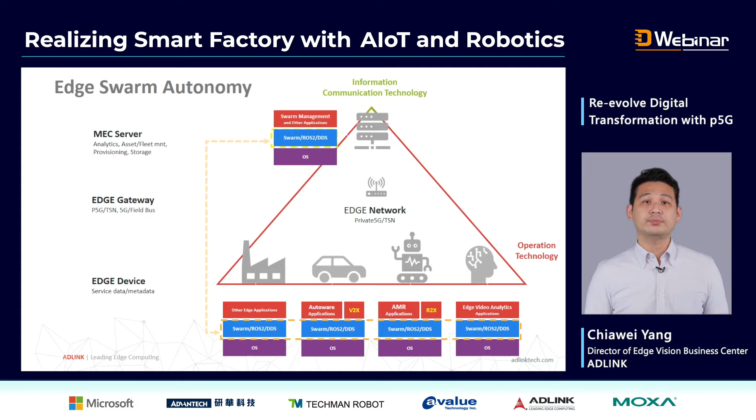Let's take a look at smart manufacturing specifically. I'd like to share the 3 key success factors. The first one is the field. The field can bring more experience, not only to enhance the production process, but also to identify or define the right edge devices for a better world. So for us, field, domain know-how, as well as metadata, will be the 3 key success factors impacting the success of smart manufacturing.

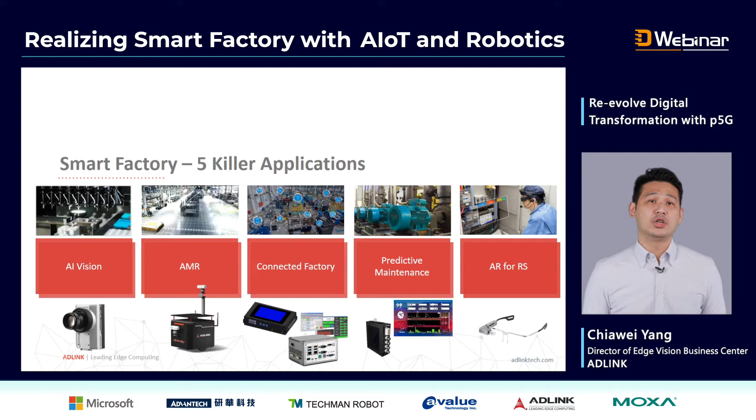With more than 3 years of experience, I'm glad to share that most factory owners right now are considering what could be the right topic, the right technology to bring in to enhance operation efficiency, lower the defect rate, and increase productivity. So the 5 topics include AI vision, AMR, as well as the 2 classic IoT applications, and last but not least, how to leverage an AR camera to do training or repair missions.

Having said that, you may understand factories are used to utilizing AOI equipment to ensure production quality on different objects, whether it's mobile phones, laptops, or even food and beverage.

But in the past 3 years, factory owners have realized there are already 100 or 1,000 cameras deployed in the factory. So we can leverage the existing camera system or NVR system, just empowering it with some AI capability to convert image or video into digits—from analog signal, the image, into useful data. Then you can do more analytics and calculate operation time, cycle time, or whether someone has stepped into a hazard zone, ensuring more safety for both human beings and the entire process.

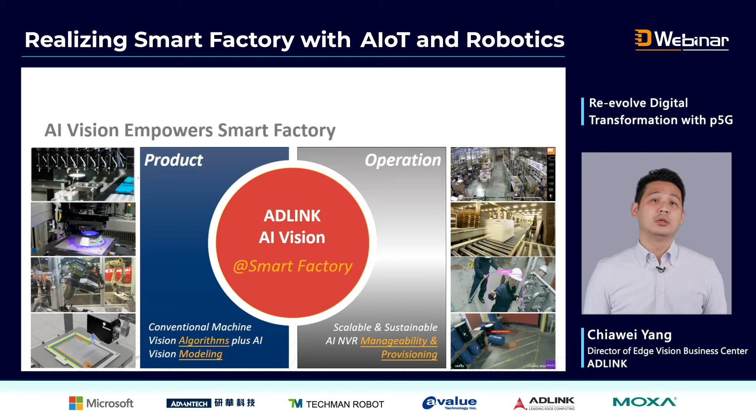With a bunch of cases, we've engaged with customers and system integrator partners, so I'd like to share some interesting examples. On your left-hand side, you can see people utilizing an AI camera to ensure safety in a construction area, and also leveraging the AI camera to count people and identify gender, because they can calculate which model or goods will earn more money.

Also on your left-hand side, with more and more autonomous vehicles deployed into the factory, you may need an automated alert system to avoid any collision with a human being. On your right-hand side, you can see examples like food and beverage, chicken wings, tires, and agriculture, leveraging AI vision to detect defects, which was quite difficult to do in the past.

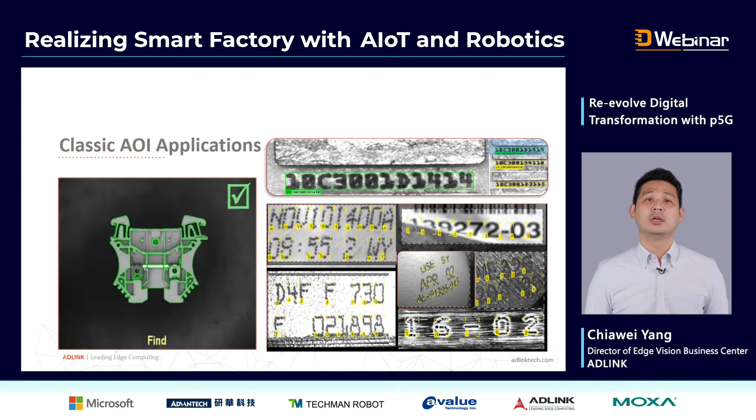Let's look at two classic applications for traditional AOI, like measurement or identification by scanning a code. But it's not good enough, because considering a character or a number on your t-shirt, it's quite difficult to identify or convert into digits.

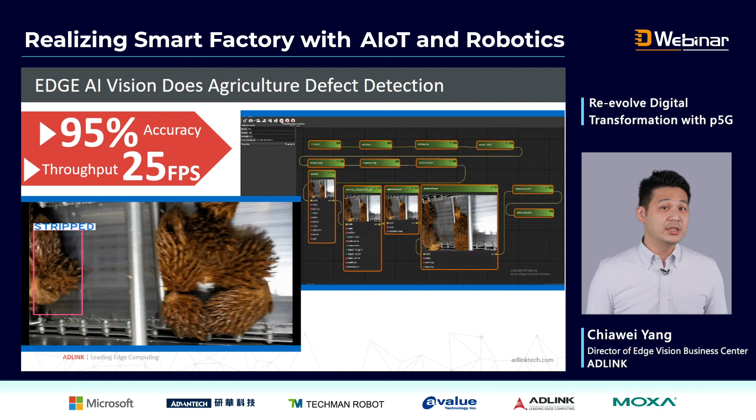So you may need not only traditional machine vision software, but also more specific AI models. I'll share an interesting case: people utilizing an AI camera with a specific AI model to detect whether fruit, like oil fruit, is stripped or not. With a no-code low-code environment, you don't even need to think about hiring a data scientist or software engineer. You just need to leverage your in-house system integrator engineering team with this no-code low-code environment to design the entire AI vision application.

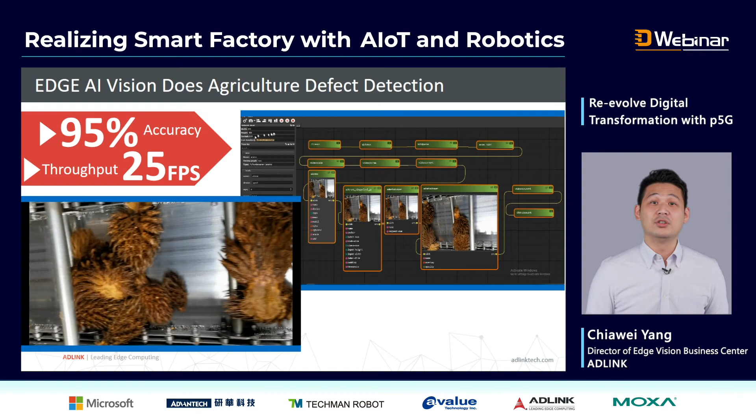There's a second case, as I mentioned earlier. It's not only about ensuring operation efficiency, but also ensuring safety for not only your employees but also contractors. A typical case is a semiconductor foundry hiring a contractor to refine chemical ingredients. So how do you ensure the operator or contractor wears the suitable safety suit, and the truck parks in the right place? By leveraging the AI model and AI camera, our customer accomplished this mission easily.

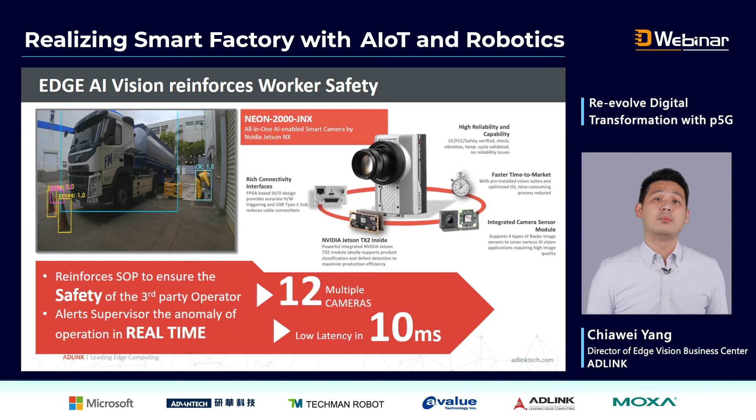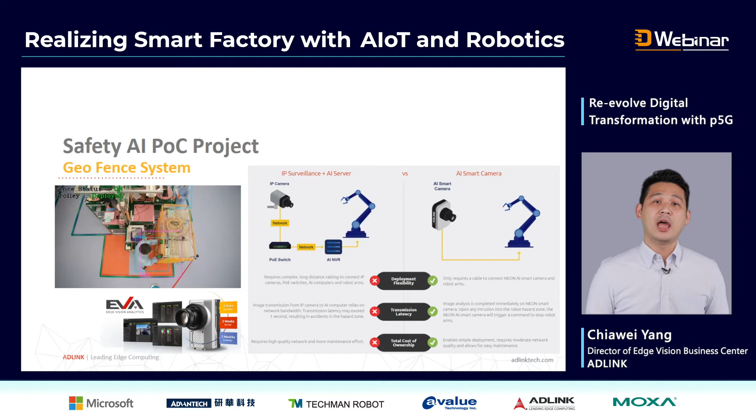For instance, we established a geofencing system in our own factory. You may be able to see the video on screen. With geofencing technology, we can identify whether the operator wears the suitable gear, and prevent any high power damage to the human body.

As I mentioned earlier, no-code low-code environment is now a famous tool chain for AI applications. It's not only beyond Python script - of course we can integrate with Python script, don't get me wrong - but we can utilize this no-code low-code IDE environment to accomplish the entire AI application in four steps.

The first step is to capture the image, with a bunch of cameras which includes IP cam, industrial camera, RTSP, or even streaming from another server. The second thing is how to do image preprocessing, because your edge devices may have limited computing power to do the analytic things. So it will be very powerful to help you save money and computing power in the third step.

The third and most important step is doing the inference. We host two major inference engines: OpenVINO powered by Intel, and TensorRT powered by NVIDIA. We also host ONNX runtime and model powered by Microsoft. So there are three major AI inference engines you can manipulate with your specific AI model. Last but not least, you have to stream out your result with the right analytic inference engine.

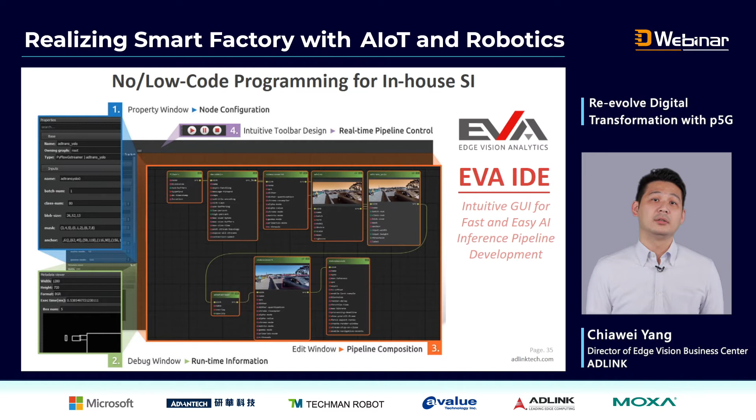But beyond just a tool chain, with 18 months of experience working with our system integrator partners as well as end users, we understand and identify 80% of the common interests from the factory. For example, geofencing to ensure safety around the factory - it can be designed to ensure safety around the robot arm, and to avoid any indeterministic object entering the hazard zone.

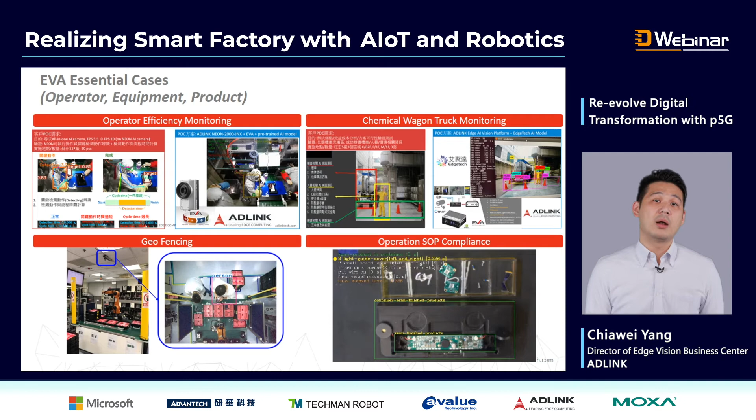But there's still a challenge for AI vision, because you can find a bunch of AI models created by freelancers on open source, and you may understand it may not all be workable with our offering. The good thing is we identify more than 20 applicable AI models here, and by leveraging NVIDIA, AWS, or Microsoft Azure service, you can do the labeling, then generate the suitable AI model, then deploy it onto our EVA devices.

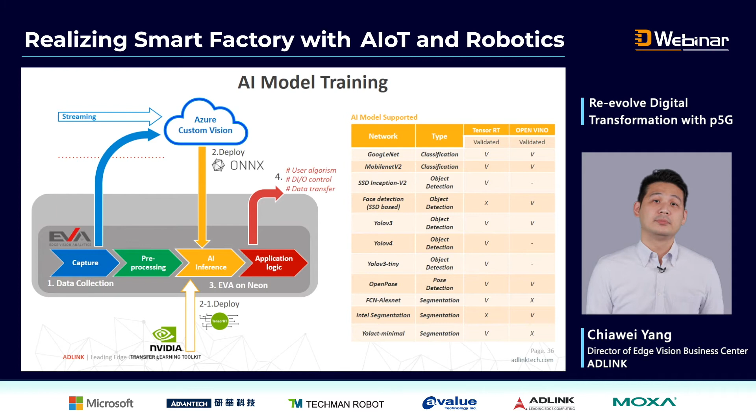But beyond that, it's not good enough to help you kick off your POC project. Before you identify the return on investment, we understand you need certain evidence from the AI POC project. So how to shorten the period to deal with the POC project? That's our offering: a fast AI Vision POC kit, which includes not only the local environment software environment, but also an AI smart camera already integrated with the right sensor, the right computing power, the right I/O, as well as connectivity. Not even mentioning, we also have a bunch of sample code or templates, so you can just change the input source or even change the inference engine.

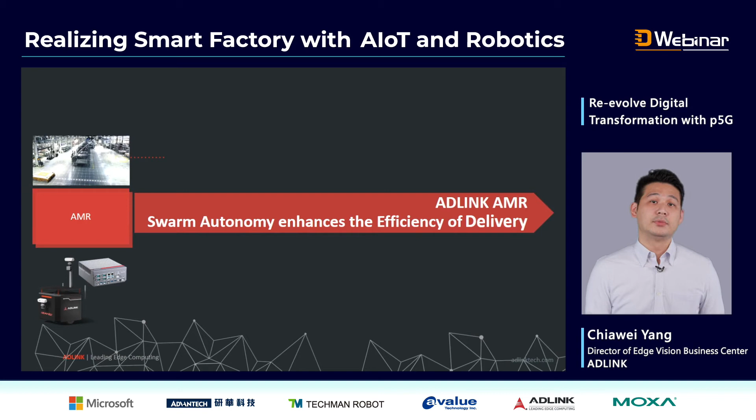The second thing is AMR. So considering if you need your devices with more mobility and can shift the goods from A to B dynamically as well as automatically, beyond the traditional AGV system, the AMR system can help you avoid any collision with different obstacles. They can also work together by controlling with the fleet management system, and they can share messages, results, or even data with their neighborhood. That's a fantastic system.

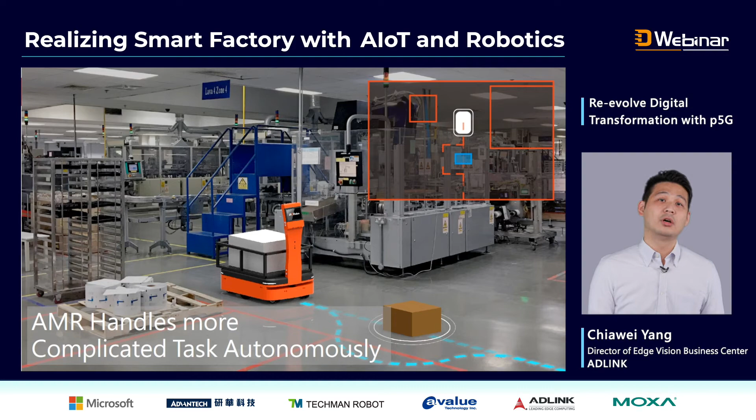Considering outside of a factory, people talk about the autonomous vehicle; indoor, we call it AMR. That's a very typical case that we already found and deployed in the AUO factory. It's not only about cooperating with each other with different AMR systems, but also cooperating with traditional AGV systems, and streaming data and results to the fleet management system as well as the MES system.

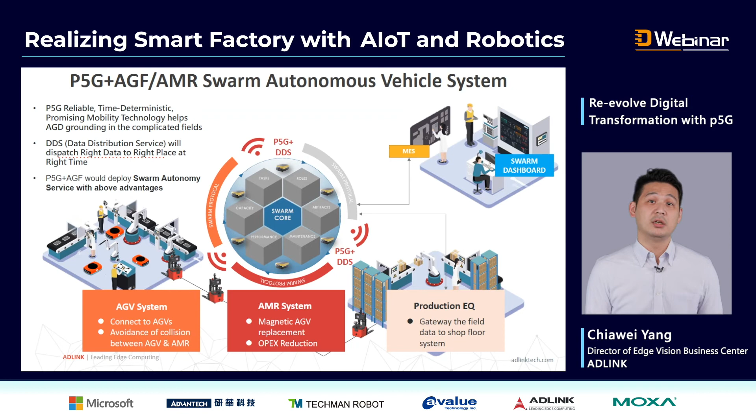Last but not least is still regarding IoT. With a bunch of sensing systems as well as gateway systems, right now the factory can say they may have some digital twin for their factory.

But considering the penetration rate is still low, the share is still low, that's why factory owners are still chasing more and more powerful IoT devices to extract data from legacy machines or from machines without a controller.

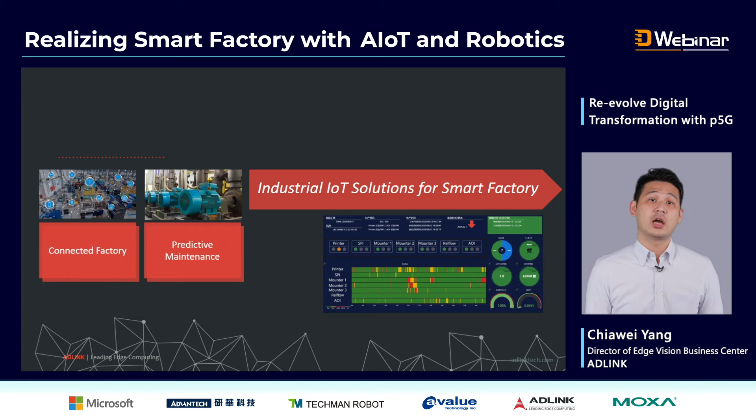Having said that, you may be able to identify pumps, different kinds of pumps operating in your factory, like the air compressor, dry pump, for semiconductor use. It's quite difficult to get the healthy or operation status from old equipment without a controller.

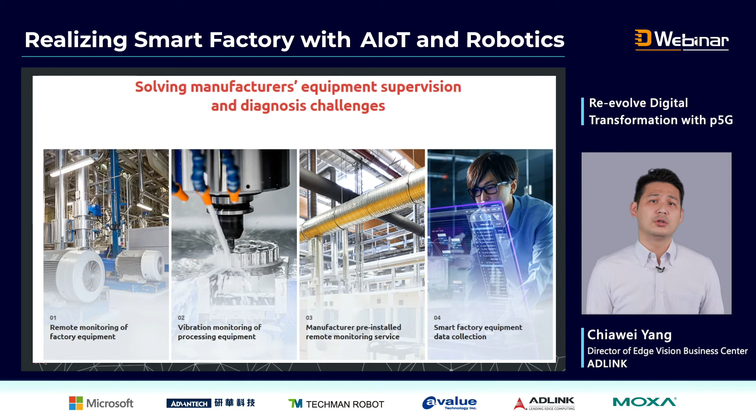That's why Adlink provides very unique devices which are able to extract data from both PC-based equipment as well as PLC-based equipment. Thanks to AUO Digitech, we have a very tight synergy to develop this data acquisition system, which is a PLC gateway without any coding.

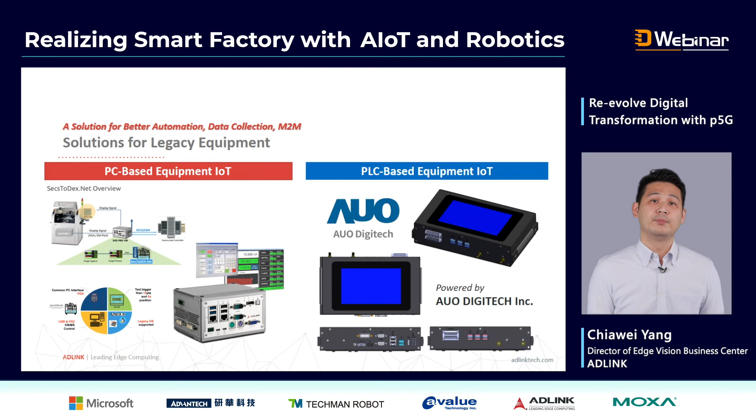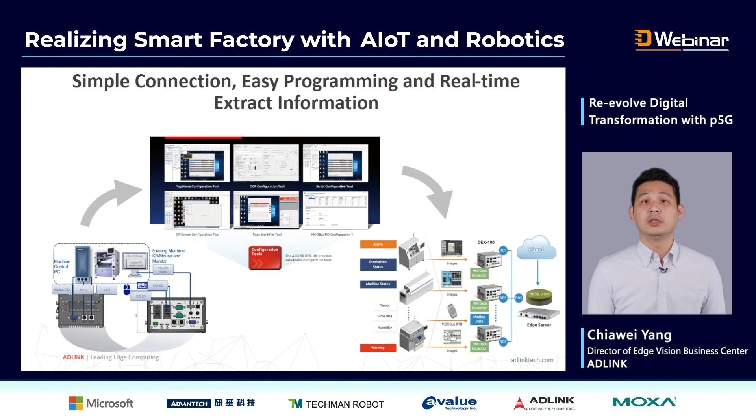With the PC or PLC-based data extractor, the gateway, you don't even need to think about how to program it, because the environment is still local. You just need to configure what parameter you want, then you can get what you want.

You may be surprised—this kind of data extraction device can be empowered like a factory Uber, to call the AMR dynamically, randomly, to dispatch different cargo or objects anywhere. So with this intelligent gateway system, you can convert or upgrade your unconnected equipment with connectivity from now on.

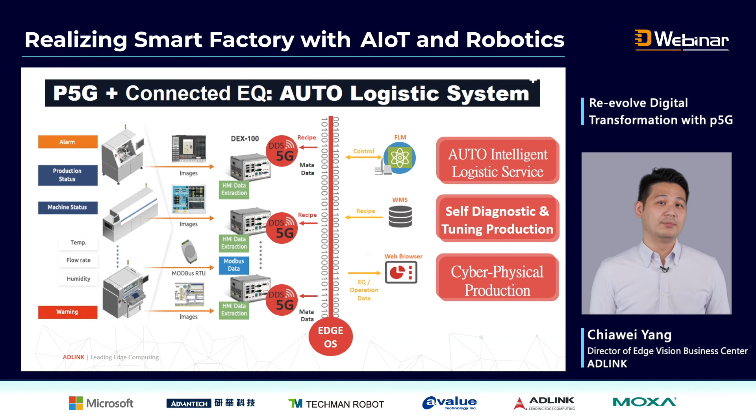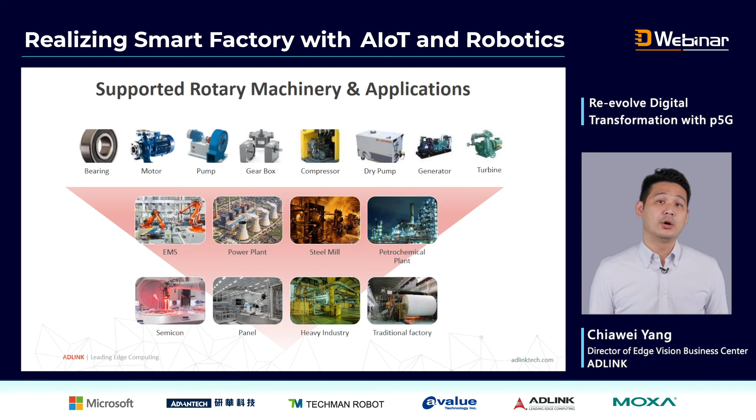Having said that, there may be a bunch of equipment without a controller, without a PC, without a PLC. So how to get the health status from them? The only way is to deploy a bunch of comprehensive environmental sensors. But how to acquire the data from those sensors? Considering the limited space in existing equipment, tiny, powerful sensors with some connectivity capability will be one of the key factors users or system integrators are now looking for.

I'm glad to introduce the machine condition monitoring series here. With the type of sensor connection, you can select what you want from our catalog.

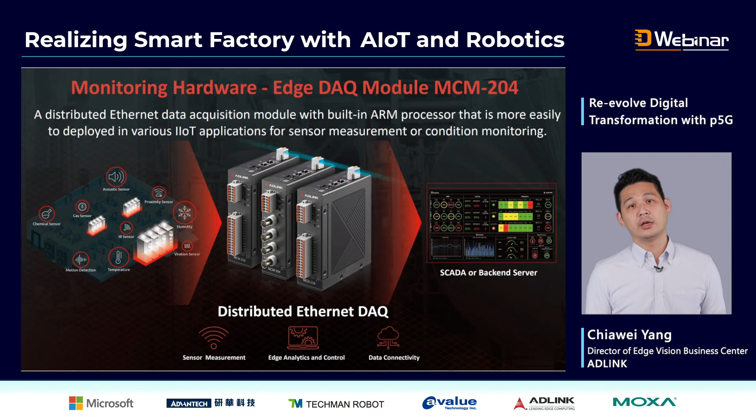One of the things here is that we do have a very successful case in the semiconductor industry. Users are just utilizing this MCM series and saving more than 500K per year by alerting any anomaly for the dry pump system or compressor system in advance.

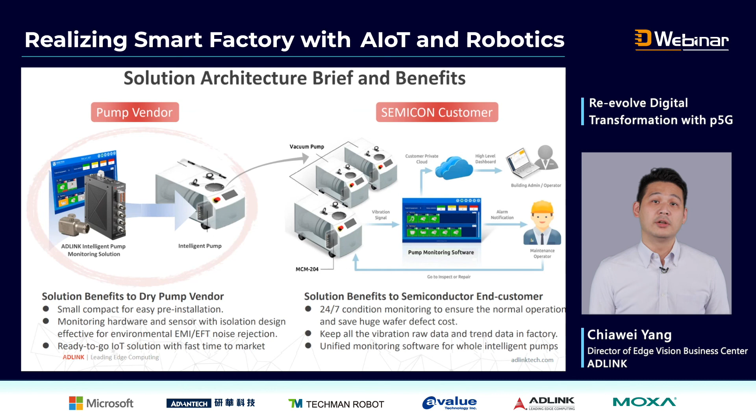Last but not least, without those powerful ecosystem partners, we cannot accomplish the mission alone. It's not only related to the AMR, but also AI vision, as well as predictive maintenance, the PHM system, and also IoT connectivity.